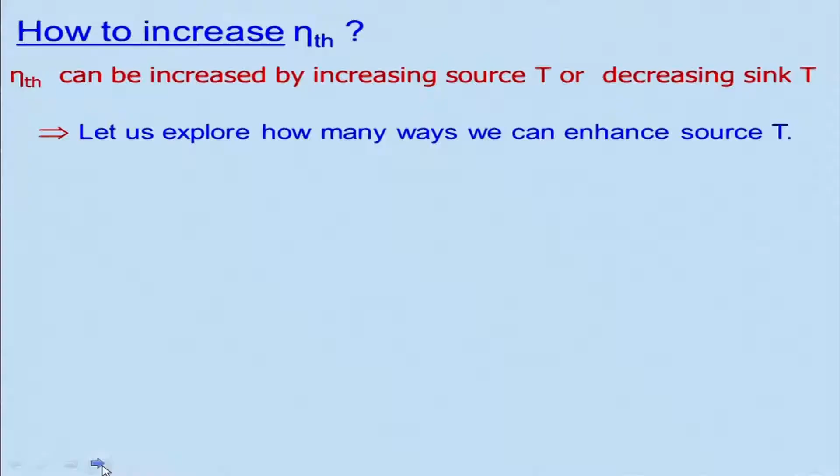As I told, we can use this superheated steam. If we operate from state 3 to 4 and expand, we may face some problem, the quality of the steam being less than 0.9, then we have a problem.

But if I superheat it further, from 3 to 3 dash, what will happen? Of course, the temperature of the boiler will be higher, and also the steam will be entering the turbine at a higher temperature. So the question arises whether it can take that temperature or not, depending on the material used both in the boiler and the turbine. The turbine is more critical because it is a rotary element, a rotating system, so it will have not only centrifugal stress but also thermal stress that the turbine blade has to take.

However, if material is available that can withstand high temperature, then if I expand from 3 dash to 4 dash, what happens is there is a change in quality. If you look, this quality at 4 dash is closer to the saturated vapor line, this is your saturated vapor line. So therefore the quality will be improved. That means you are basically winning on both sides, it is a win-win situation.

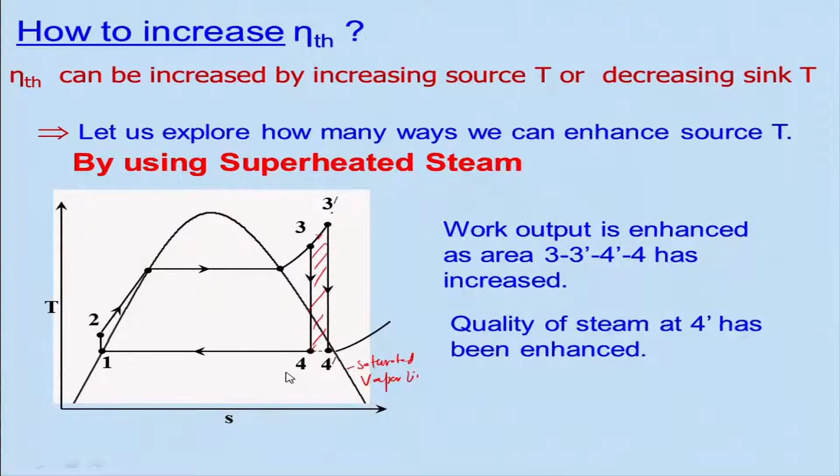As a result, what happened? The work output has been enhanced. If you look at this portion, the work output is being enhanced, apart from the work input - there is an additional increase here. Therefore, the work output will be getting higher and thermal efficiency also will be higher, and also the quality problem is being solved or improved. As I told, the quality of steam at 4 dash is greater than the quality of steam at state 4, so therefore the quality has also improved.

So the question arises, how far can we go on increasing temperature 4, the maximum temperature at state 4? There is a limitation, that is the metallurgical limitation, because it is generally restricted to 600 degrees Celsius. That means it will be less than or equal to 600 degrees Celsius as of now, but tomorrow maybe better material will be available, and then one can go for higher temperature.

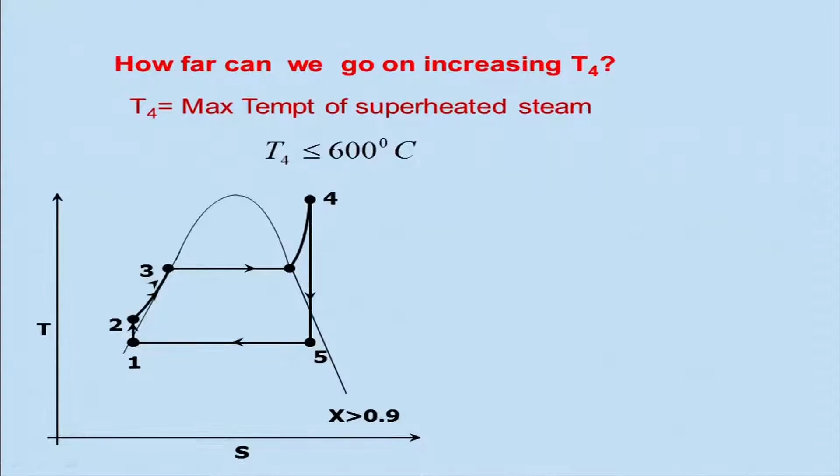So, as a result, if the temperature is higher, the source average temperature has been increased, because you are going for a higher temperature T4.

Another way to go is to increase the boiler pressure. What will happen if we do that, keeping the temperature the same, because there is a limitation that I cannot go beyond 600 degrees Celsius? So, if I keep that, there is another way you can increase this boiler pressure.

But then there is a problem, if you do that and keep this temperature, you again land in the problem of quality 5 dash. Quality 5 dash is basically away from the saturated vapor line, so this will be lower than 5, x will be lower than 5. Then you will have to learn how to handle and overcome this problem.

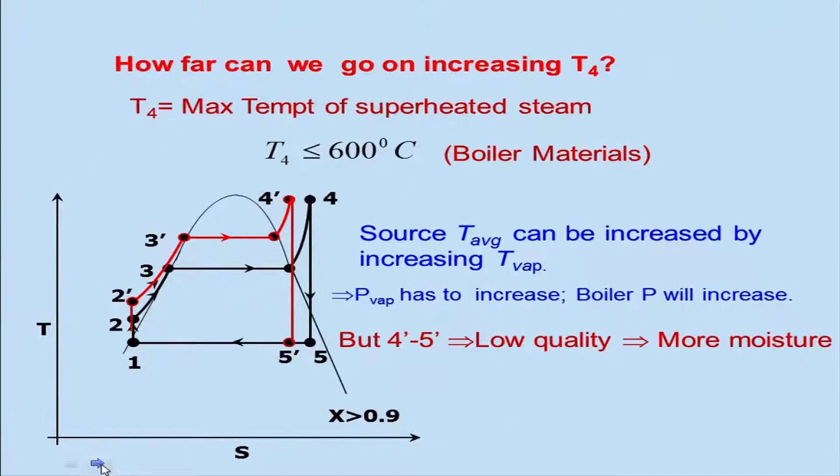As I told, that 5 dash, lower quality of the steam, means more moisture will be there in the steam at 5 dash as compared to state 5. So corrosion of the turbine blade will be occurring, and that is the problem one has to look at.

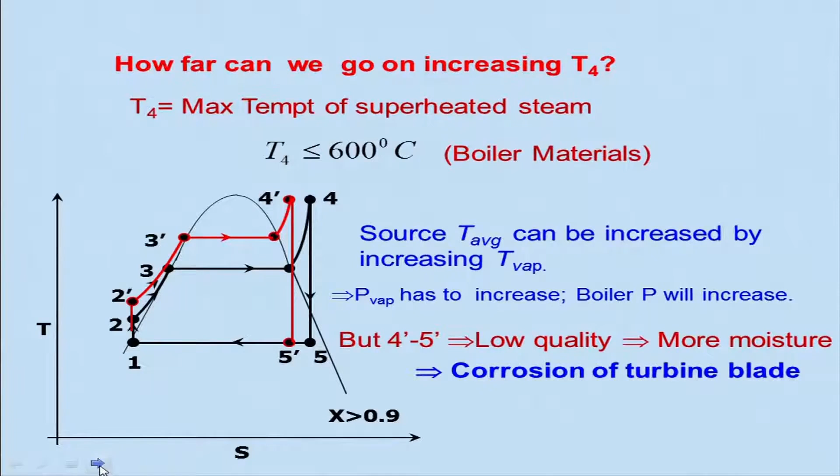So there is another way: if I go on increasing the boiler pressure, I can reach a point, the critical point. If I increase to that critical point, the liquid will be converted directly into vapor. This is your superheated vapor region.

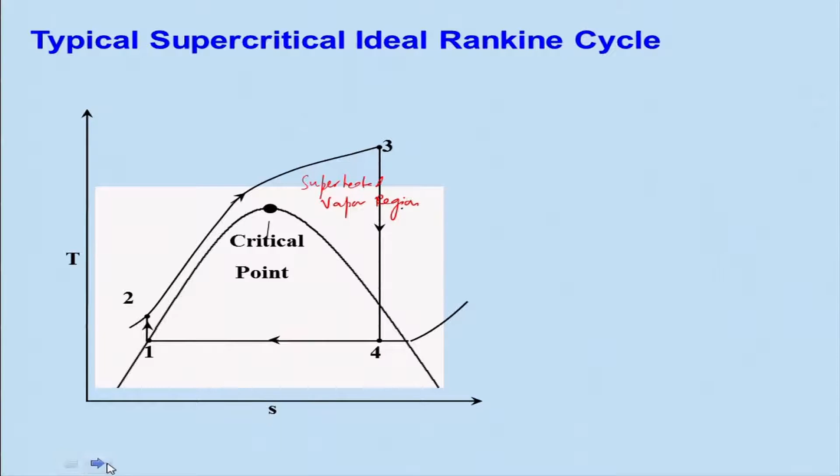Of course, we are considering ideal, so it is a supercritical ideal Rankine cycle, and nowadays people are using this condition. If you look at it, as a result, its thermal efficiency is quite higher as compared to the superheated Rankine cycles.

The critical pressure is 22.09 megapascal, but nowadays people are operating around 30 megapascals. In India, we have a few supercritical power plants, particularly recent ones, but the numbers are very less, and we are basically importing this technology. We do not have our own, and I wish some of you will work and develop a better power plant design, basically supercritical.

And of course, there will be an increase in work input in the pump, because it is going for higher pressure. So naturally the work input to the pump will be much higher compared to the superheated steam power plant. Of course, one has to pay for this, and also the pump will be bulky and the cost will be higher, and lots of other problems come into the picture.

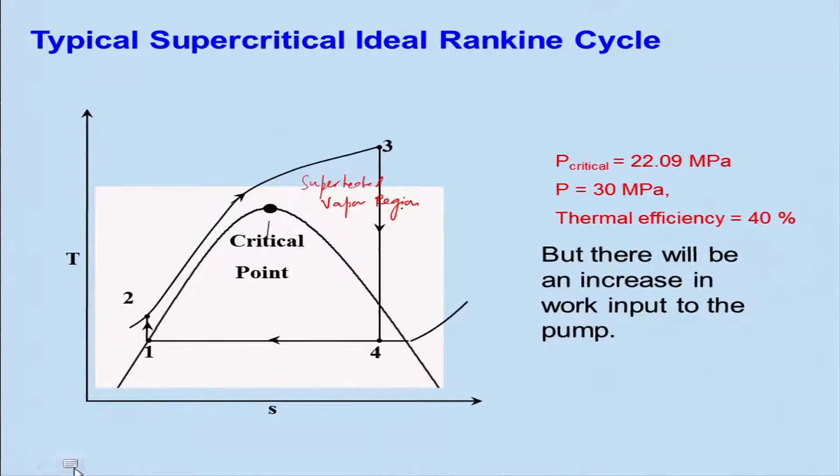So how can we increase the thermal efficiency without increasing the maximum temperature, because as I told, there is a metallurgical limit? The limit for the turbine is 600 degrees Celsius, we cannot go beyond that. But then the question arises, how can we increase it without really increasing the maximum temperature? So what are the ways? Any idea?

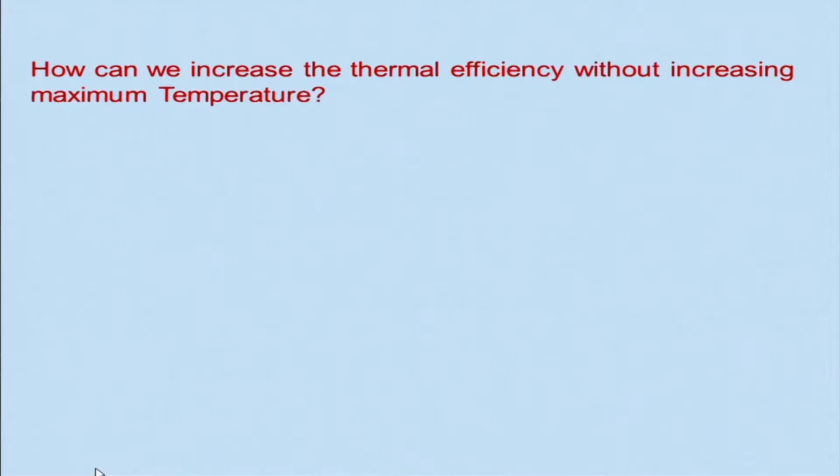As we discussed, we can use a high boiler pressure, that is one way of doing it. Another way is reheating the steam while avoiding the problem of excessive moisture at the LPT. That means we will basically be expanding the gas to a certain extent, maybe in the superheated region, then reheat it and go again to the maximum temperature and expand it again, so that we can overcome the problem of moisture at the end of the expansion.

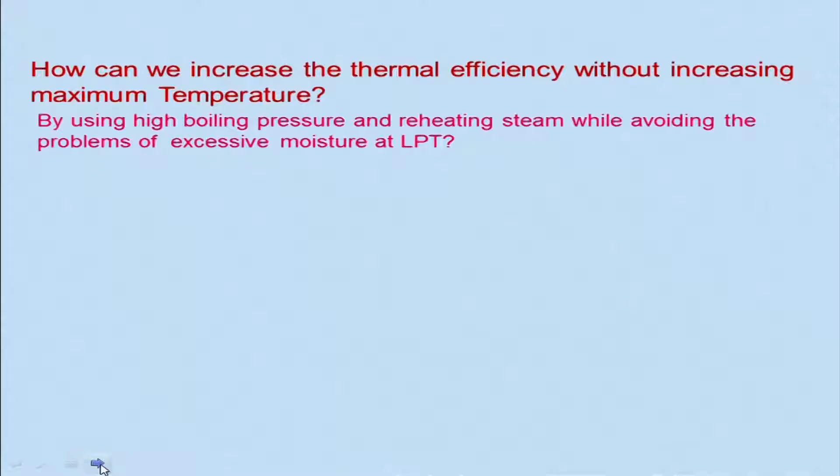So, if you look at a typical reheat cycle system shown here. In this case, what happened? This is a boiler, and there is a turbine that can be divided into two categories, two portions. One is high pressure turbine and this is a low pressure turbine.

So, in the first, what will happen? Heat being added in the boiler, it will come to this high pressure turbine, that is 4, and then it will be expanded. Once it is expanded, it will go to boiler again and get heated up and come to expand again in a low pressure turbine, and it will go to the condenser, and then after that it will go to the pump and go back to the boiler.

So, that is known as reheating. So, what is happening? It is coming over here to the boiler, then it will go to the turbine, and the expansion 4 to 5 is basically in the high pressure turbine, and 6 to 7 is basically low pressure turbine, and this portion is reheating. 5 to 6 is nothing but your reheating.

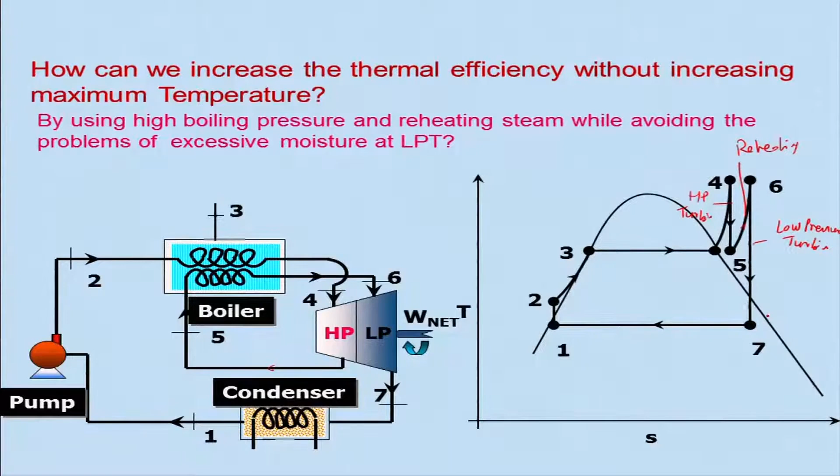You are heating again to the maximum temperature, so T4 is equal to T6, you can think of it ideally that way. So what you are doing is reheating. As a result, you are getting the gas expanding in the low pressure turbine to X7, which is closer to the saturated vapor line. And if it could not have been done, then what could have happened?

It could have expanded this way instead. If I say this is 7 dash, that means the quality of X7 dash could have been very less than X7, yes or no. If you say that X7 is 0.9, X7 dash will be definitely less than 0.9. It will be maybe 0.8 or 0.75.

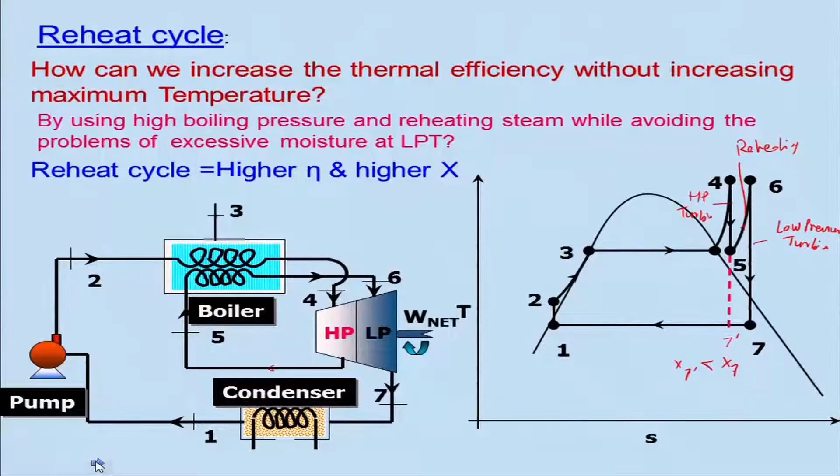So the moisture content at this point without reheating could have been higher, and then corrosion could have been more, that problem would occur. So if you look at it, not only are you avoiding the problem of moisture or quality of the steam, but you are also adding heat here. So what happens? The average temperature is again increasing, and you may get higher thermal efficiency. So it is basically a win-win situation, we are getting higher thermal efficiency and higher quality of the steam, meaning moisture content will be less.

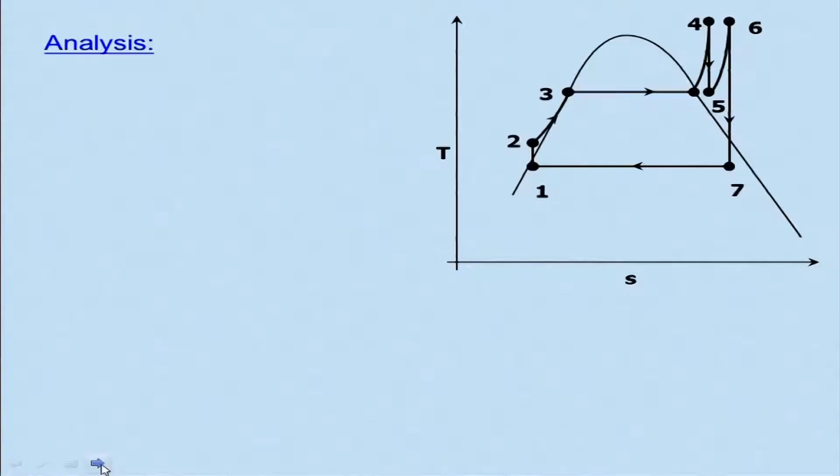So let us look at how we can analyze this problem, the total heat added per unit mass will be equal to Q in. What is that? This is from H4 minus H2, that's Q in, and also the heat added here is also Q in, H6 minus H5, this is heat addition, from H5, H6 to H5. This addition is from here to here, that is your Q in.

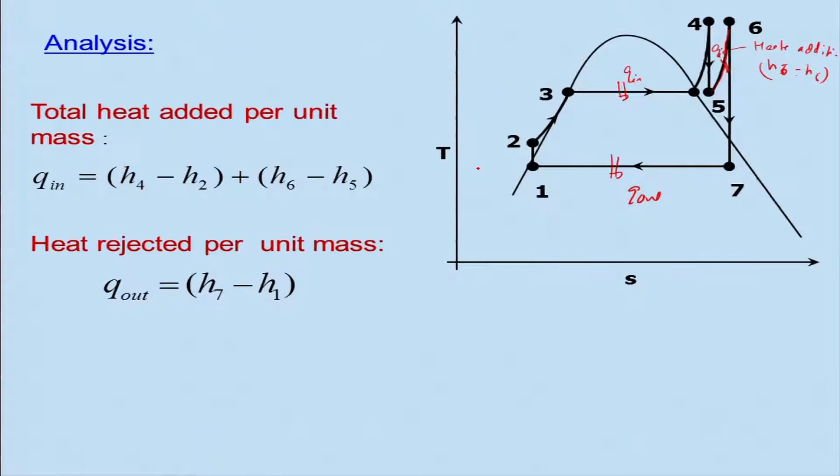And heat rejected as usual, that is Q out is nothing but H7 minus H1. So the thermal efficiency, you can say this is Q in minus Q out, that will give me the net work output. If you look at this portion, it will give me net equals W turbine minus W pump, yes or no? So that is nothing but Q in, we have seen H4 minus H2 plus H6 minus H5, this is your Q in, and H7 minus H1 is Q out, divided by the Q in.

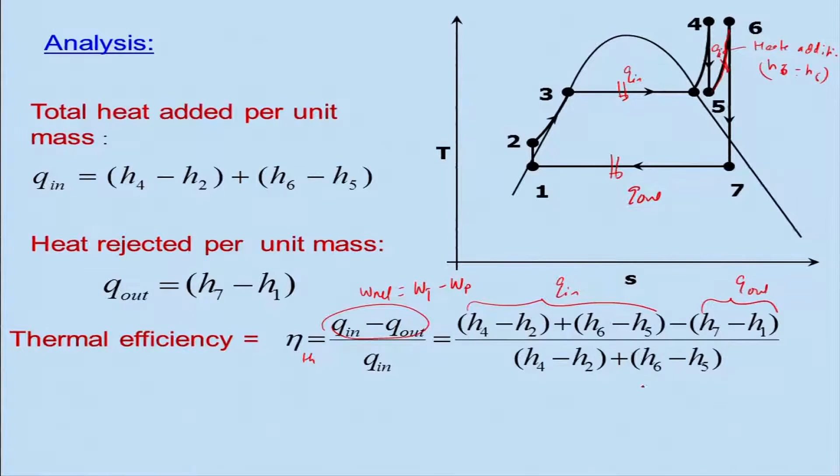So the single reheat system in modern power plants can enhance thermal efficiency by 4 to 5%, which is quite a bit. If you increase your thermal efficiency by even 1%, it matters a lot because the power plant is on the order of megawatts. So people strive to get even 1%, they will be very happy, and 4 to 5% is quite a good concept. So several stages of reheat systems can be used in large power plants.

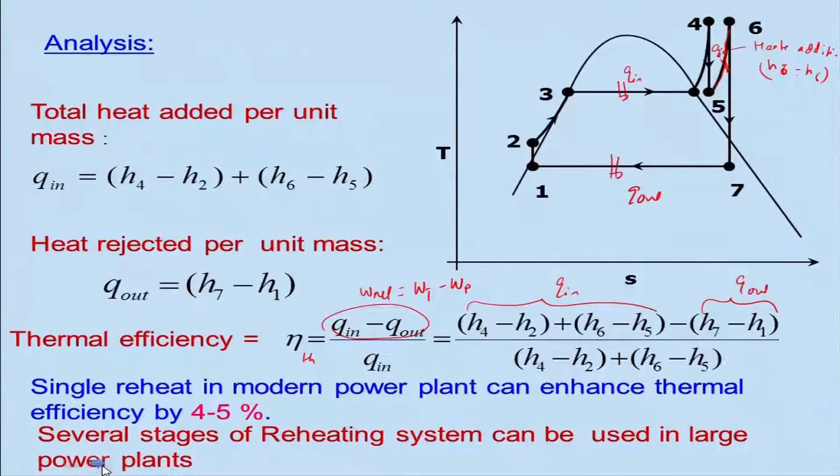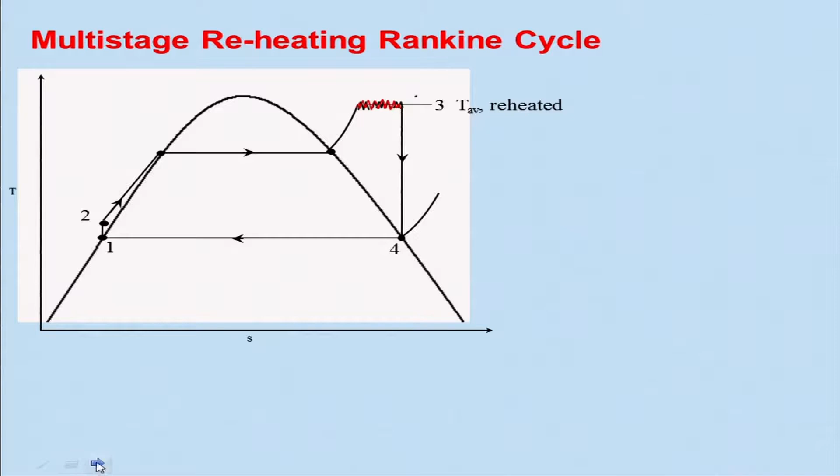It is not only one, but several, but of course it will have diminishing returns later on as you use more stages. So in a multi-stage reheating cycle, I can reheat here, take it here, then reheat here, and go on doing that. So then the average temperature will go on increasing. So that at the end of the expansion, you can get steam which is almost, one can think of getting a saturated vapor ideally. And this efficiency will be much higher compared to others. The question arises, how many stages of reheating can one go for?

Generally, people call whatever efficiency you get using the single reheat the first one. If you go for the second one, you will get half of that. Let's say if it is 4% in the first one, then in the second reheat system you will get around 2%. It's not exact, but a ballpark number. If you go for the third one, again the efficiency will be reduced, so you get a diminishing return kind of thing.

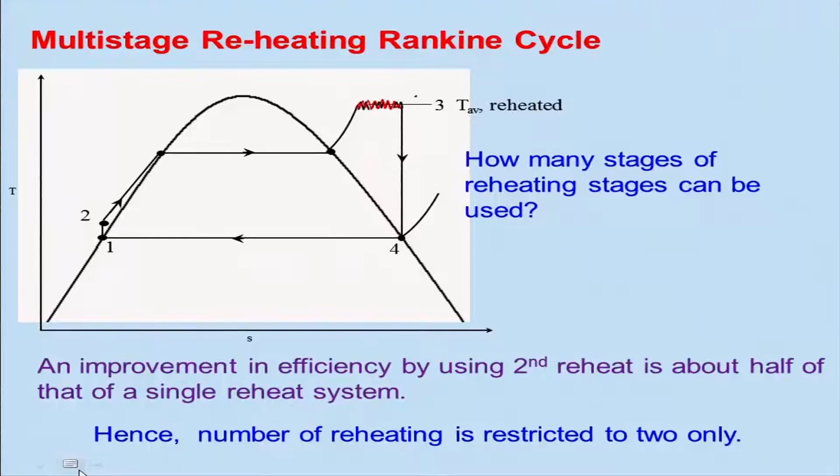Therefore, the number of reheating systems in a practical power plant is restricted to only 2, because adding more means extra reheating and piping, and a lot of cost is involved in that.

Let us consider an example: a thermal power plant operating in a reheat cycle, steam at 50 bar and 500 degree Celsius. This pressure and temperature tells us it is superheated steam, not saturated. It enters a high pressure turbine and leaves at 10 bar, and the steam is reheated back to 500 degrees, which is a restriction for this power plant.

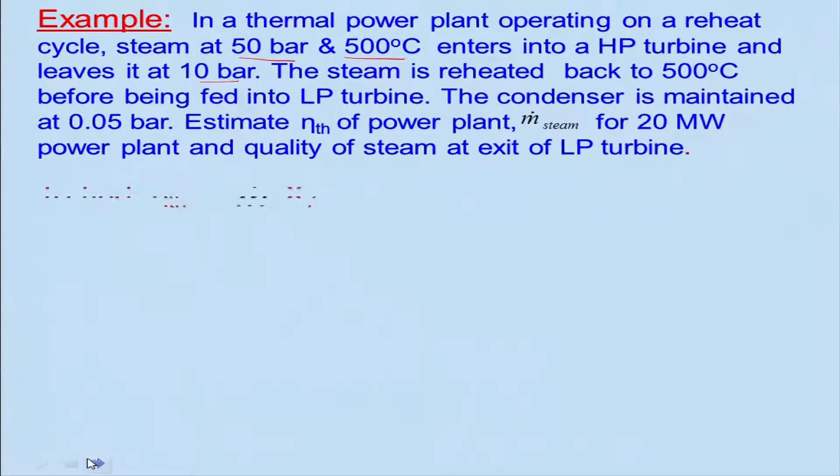So estimate the thermal efficiency of the power plant, the amount of steam for the 20 megawatt power plant, and the quality of steam at the exit of the low pressure turbine. We need to find the thermal efficiency, m dot, and x7.

If you look at this, we need to find x7 here, what it would be after the expansion. The temperature is given as 500 degree Celsius at 50 bar. If you look at this pressure line, this is also a constant pressure line. This pressure corresponds to 10 bar, and this corresponds to 0.05 bar.

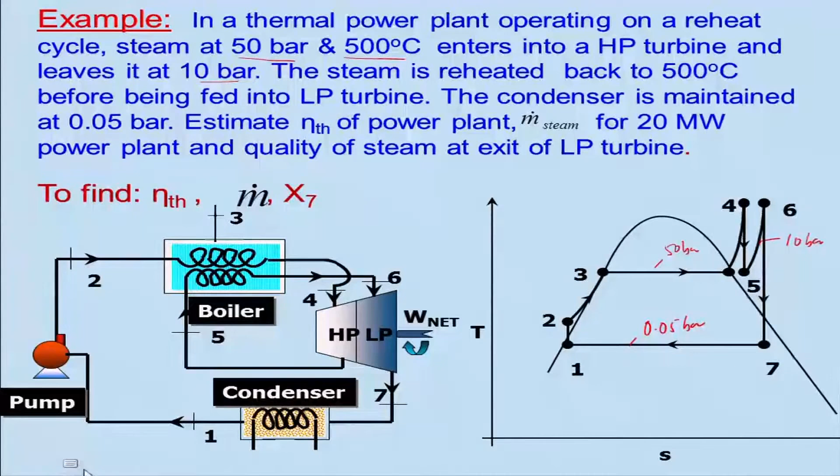Let's see how we can solve this problem. We need to find thermal efficiency, which is basically H4 minus H5, that is your turbine work — this is the high pressure turbine, H4 to H5. And H6 minus H7 is your low pressure turbine work done, and H2 minus H1 is your pump work.

Q in is given in two cases: one is H4 minus H2, that is the input, and H6 minus H5, this portion is heat being added, Q in. I can say this is Q in boiler and this is reheater — you can distinguish it. It is the boiler first and then it goes there again.

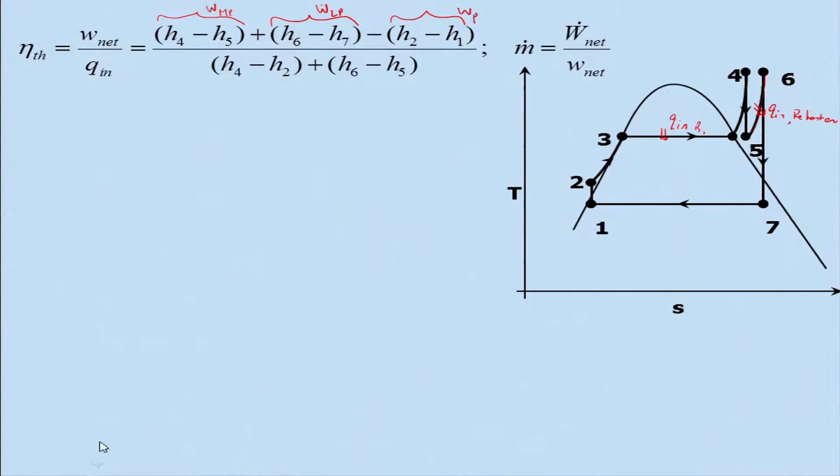So if you look at this portion, I know the temperature and pressure, so I know H4 from the superheated steam table. Do I know the enthalpy at station 6? Yes, we know it corresponding to the pressure of 10 bar and 500 degree Celsius. From the superheated steam table at 50 bar we can get H4 and entropy, and we can also get other properties not mentioned here.

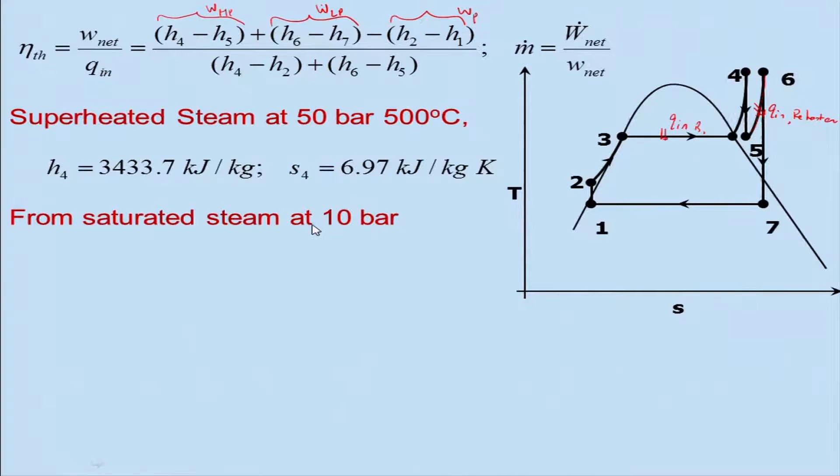From the saturated steam table at 10 bar, we can get properties like Hg, Sg, all those things. And from the superheated steam table at 10 bar and 500 degree Celsius, we can get properties H6 and S6 — the enthalpy at station 6 and entropy at station 6 corresponding to that.

You may be wondering why we need data of the steam at 10 bar from the saturated steam table. Why? Because we do not actually know this point, H5 — we don't know it. It may be superheated, it may be here also, it may be in the wet mixture region. So therefore, we need to know that.

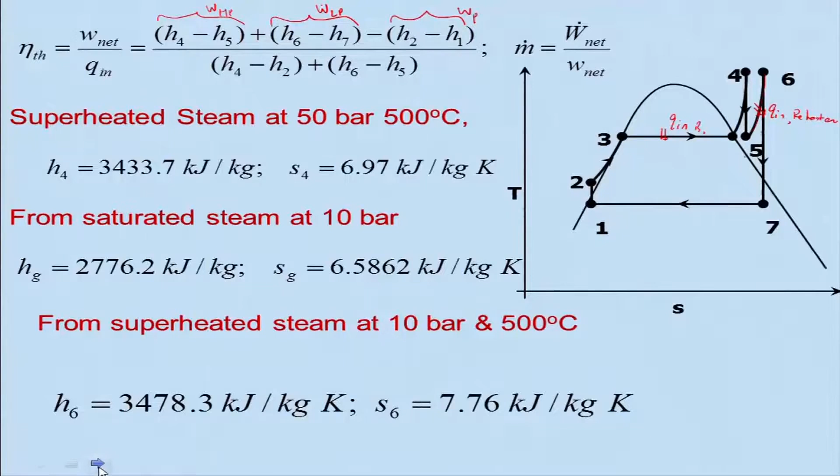So, from the saturated steam table corresponding to 0.05 bar you can get Vf and Hf, all those things, and keep in mind that this is nothing but your H1 here. You can get Hg, this is corresponding to Hg here corresponding to 0.05 bar, and if you look at this, you can find Sg.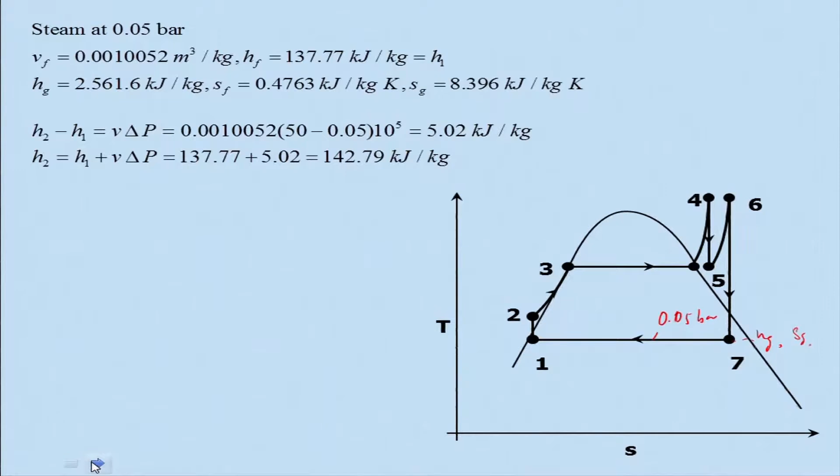And we can get this, how much enthalpy H2 minus H1, nothing but V delta P, and this is basically corresponding to Vf1 you can say. And the pressure difference, one is 50 bar, this is your 50 bar, and this difference, calculate and then you can get this H2, because we need to find out how much heat in.

Similarly, for a high pressure turbine, we know that entropy at station 4 is equal to entropy at station 5, because of the fact that this is an isentropic expansion, that is 4 to 5.

So we found that S4 is equal to S5 is equal to 6.97 kilojoule per kg Kelvin, which is greater than Sg, that is 6.5862, this is basically kilojoule per kg Kelvin. Therefore, it is a superheated steam.

In some problems it need not be. If it is in between, suppose these values, S4 is less than 6.5862, in this case then it could have been having some quality, a kind of wet mixture, not a vapor. So it will be that, but in this example it turns out to be superheated steam.

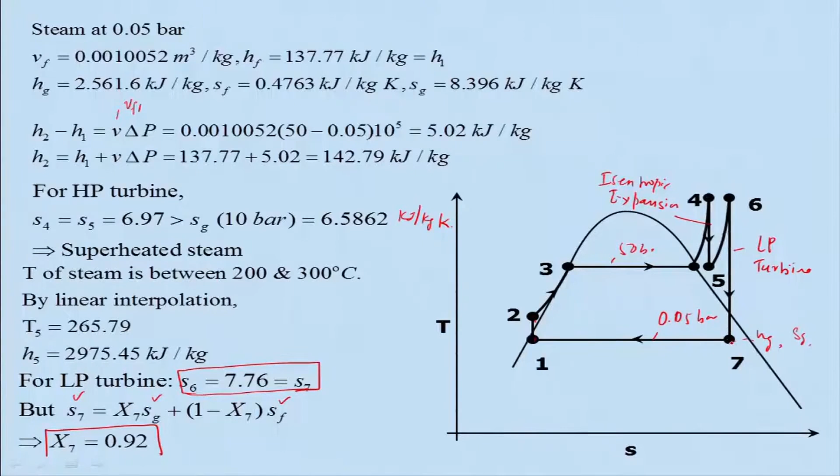S6 is known to us, and so also S7, and Sg is known corresponding to 0.05 bar, and Sf is known. So we will find out X7 happens to be something like 0.92. Once you get this quality X7, then you can easily find out what will be the enthalpy.

So then enthalpy would be, you substitute these values and you will get, this is your X7. And the net work, W net, we will find out H4 minus H5 plus H6 minus H7. This is basically the high pressure turbine work, and then the low pressure turbine work, minus the pump work, and you will get 1563.86, because all these are known.

H7, H2, H1 already we have evaluated. So you will similarly find out Q in, and Q in has two components: one is the boiler H4 minus H2, and H6 minus H5 is the reheating portion, because you are reheating the steam. So that all are known, H5 is known, H6 is known, H2 already evaluated, H4 you know. So you can calculate that 3793.78 kilojoule per kg.

And from that you can find out the thermal efficiency, because we have already evaluated the net work output and net heat input, and it happens to be 41.2%. If you look at, if you don't reheat, you will find it is lower than that, and we know the power, that is 20 megawatt. And if we know the specific work, net work output from this power plant per unit mass, then you can find out the amount of steam is 12.79 kg per second.

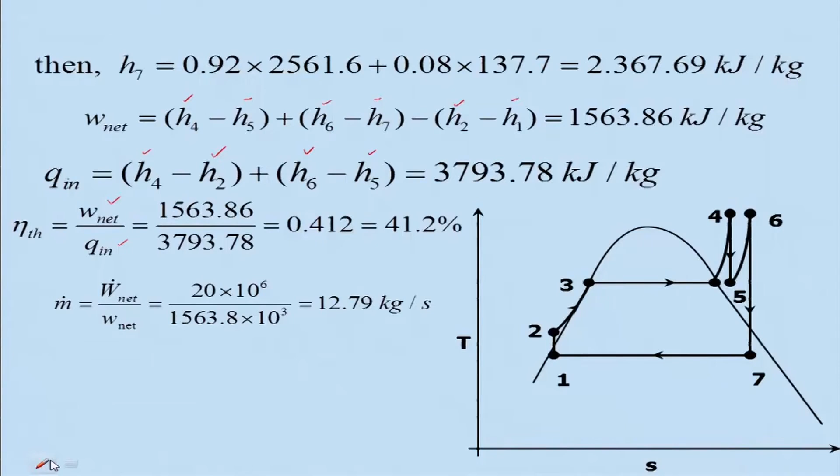So we will stop over here, and we have seen how you can use the reheat cycle and how you can solve the problem. In the next class we will be talking about the regenerative systems, where you can utilize the heat which is being rejected by the condenser. Thank you very much.